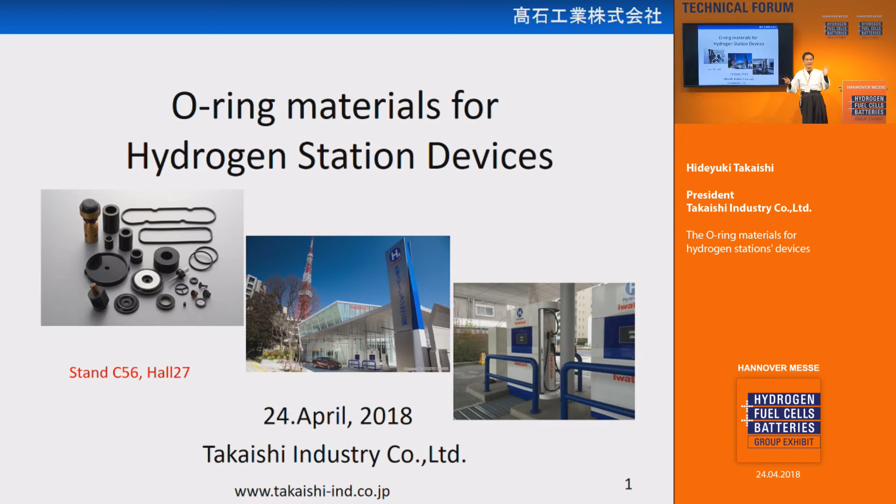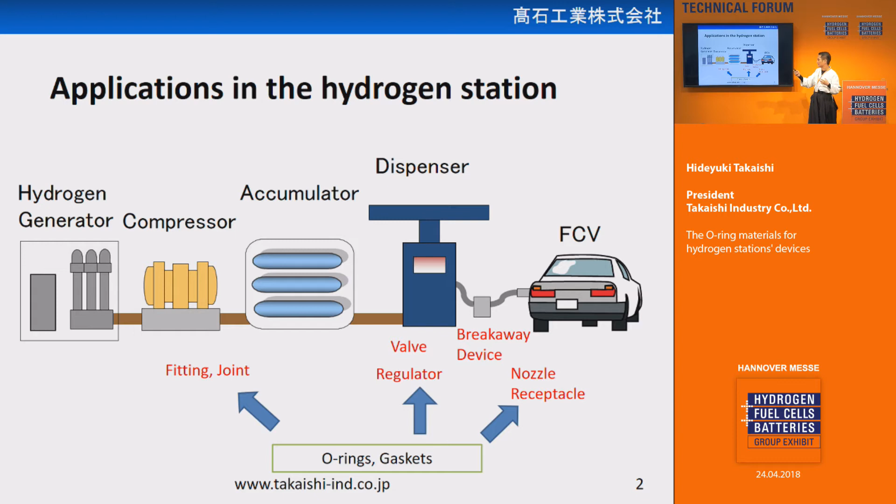So let's go. As you know, there are many applications for hydrogen stations refueling FCV. Pointing here: breakaway nozzle, breakaway valve, regulator, and the tank, compressor or electrolyzer or something. There are so many gaskets and O-rings used, like in joint fittings, valves or something. And first, I want to focus on the breakaway device. This is, I think you know, the safety device for refueling FCV.

The required specification condition of the breakaway devices is very tough. Hydrogen charging time is less than 3 minutes, the pressure range is 0 to 70 megapascal, and the temperature is minus 40 degrees to 85 degrees. This is what we call pre-cool T40. This condition is very, very tough for rubber material to seal.

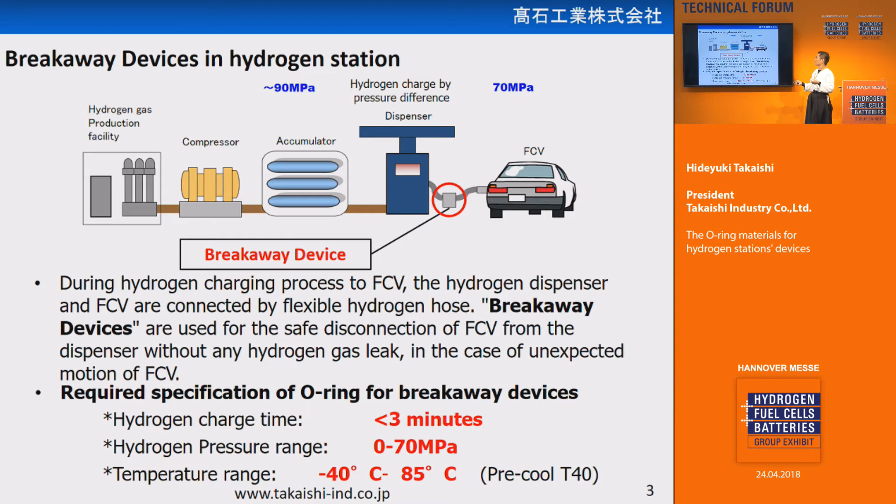So usually an O-ring will break like this. Normal O-ring, yes, with high pressure hydrogen. Hydrogen penetrates into the rubber O-rings. This is the cross section, and when decompressing the pressure, hydrogen inside will explode like a bubble, and this makes a crack. And this is the reason for the leaking.

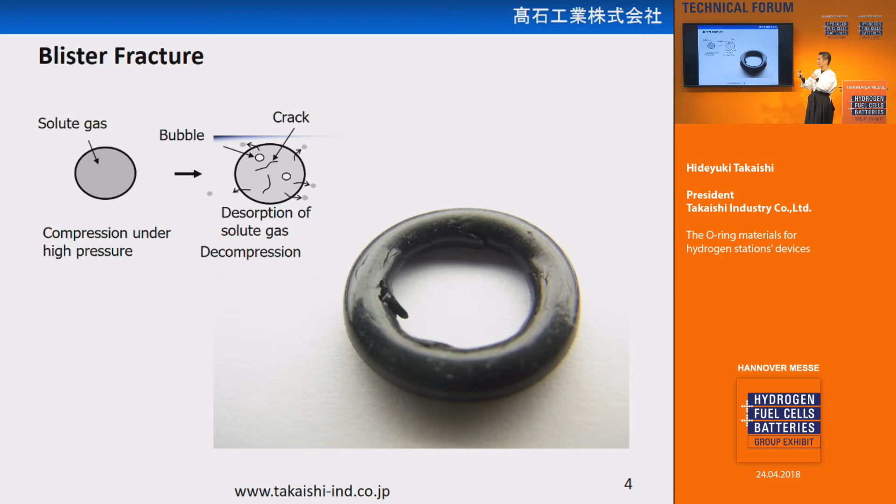And one more fracture, what we call overflow fracture: with penetrating hydrogen, there will be a volume increase of rubber O-rings, sealings, and the sealing will overflow from the groove. That will also lead to fracture.

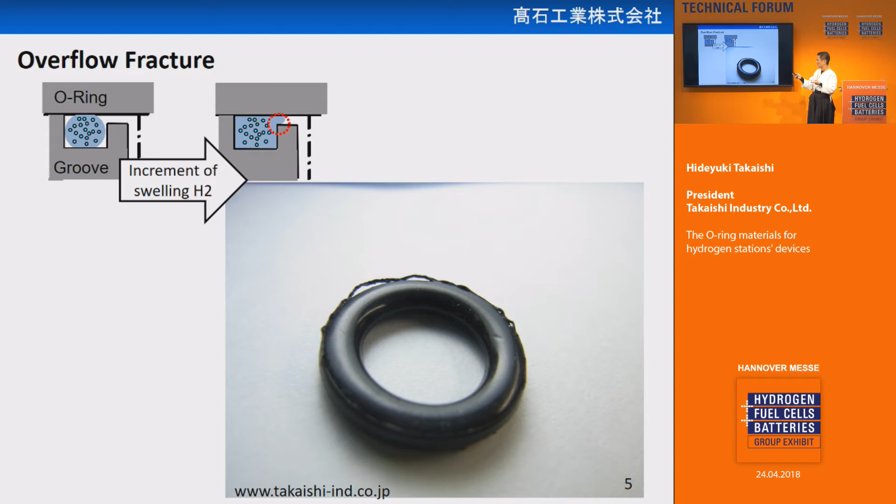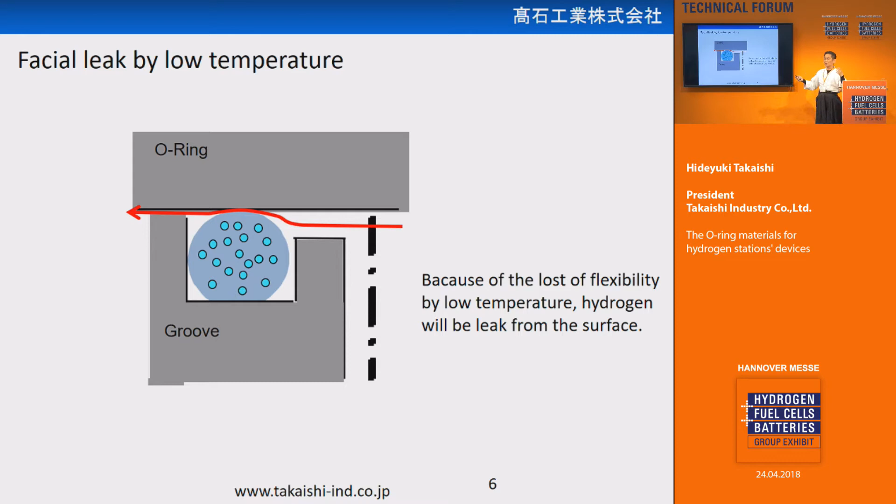And one more, with low temperature, we will have a facial leak. With low temperature, the rubber material will be frozen and it will lose the flexibility. For that reason, with high pressure, like the red arrow, hydrogen will easily leak. We have solved this kind of issue, and we made a solution with associating academia.

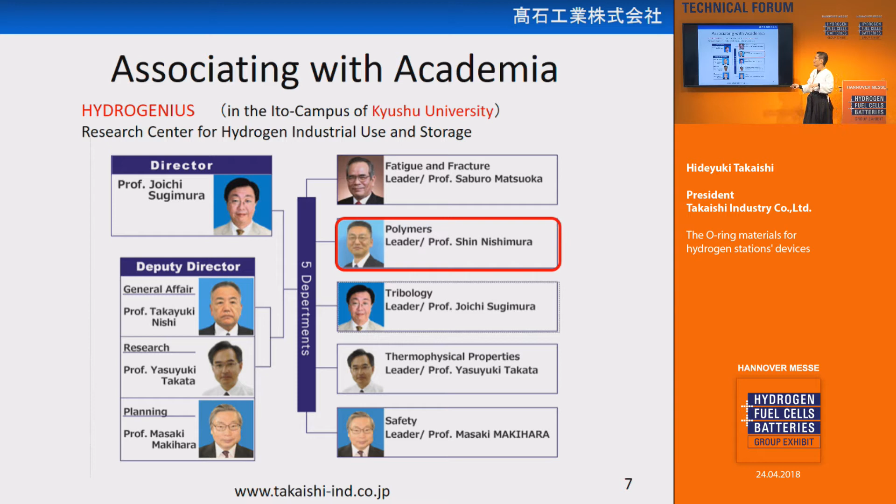This is what we call Hydrogenius. It's from Kyushu University, in the western part of Japan. This university is very, very famous for hydrogen research. And there's a polymer team leader, Professor Shin Nishimura, and we collaborated with him and made the best recipe.

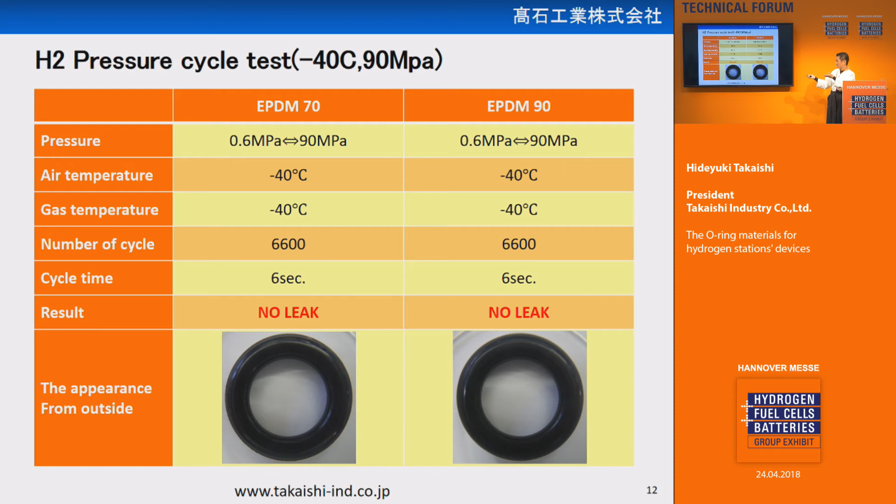It's no problem. And that's why in Japan, our O-rings, that kind of O-rings, are now used in a hydrogen station, a commercialized station. It's near Tokyo Tower, and this is the busiest station in Japan. Maybe on average we have 15 cars per day, and it's working. It's very nice. And now I'm talking about the hydrogen station breakaway devices.

But as I explained, there are many devices and many fitting joints, and by the devices the temperature range is different. For the dispenser, it's pre-cool, minus 40 to 85 degrees, and for the cylinder tank it's normally used at ambient temperature. And for a compressor, it's going to be high temperature. So the material needs to change.

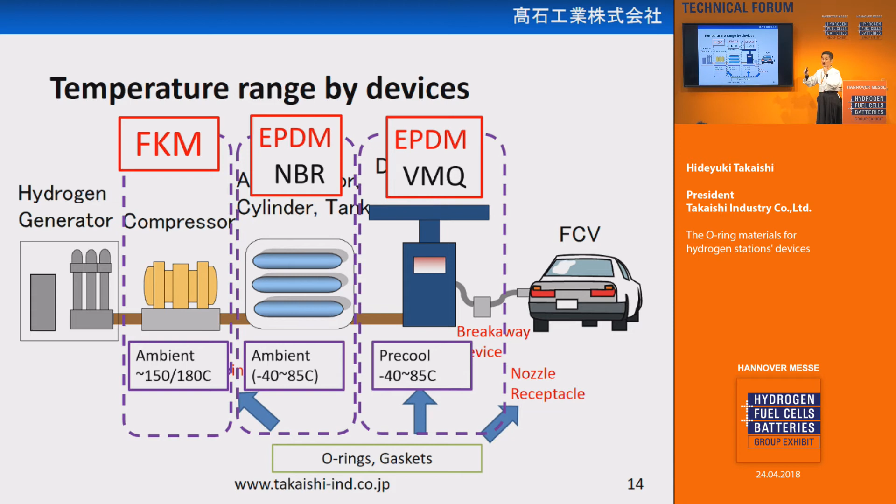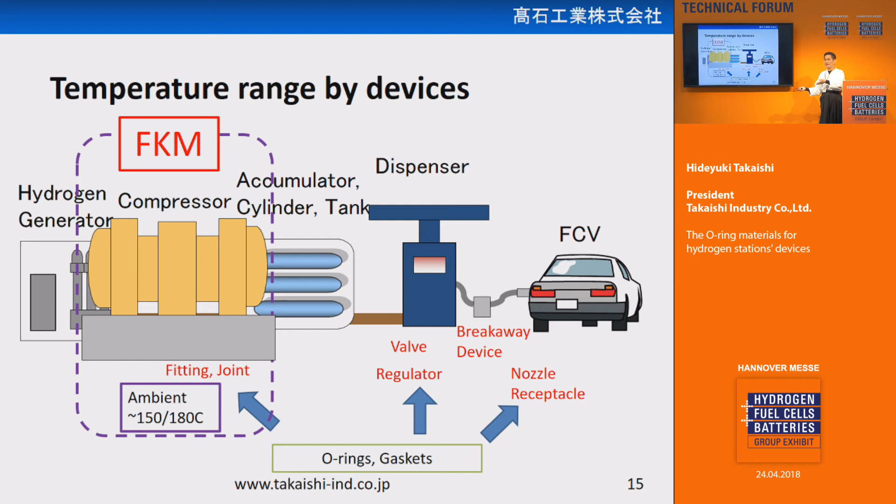So for low temperature and ambient temperature, EPDM is very good. And for high temperature, FKM will be great. So we focus on FKM as the next step. This will be used for the compressor. And we made a best mix again, we found a solution, and we put it into a duration test, a cycling test.

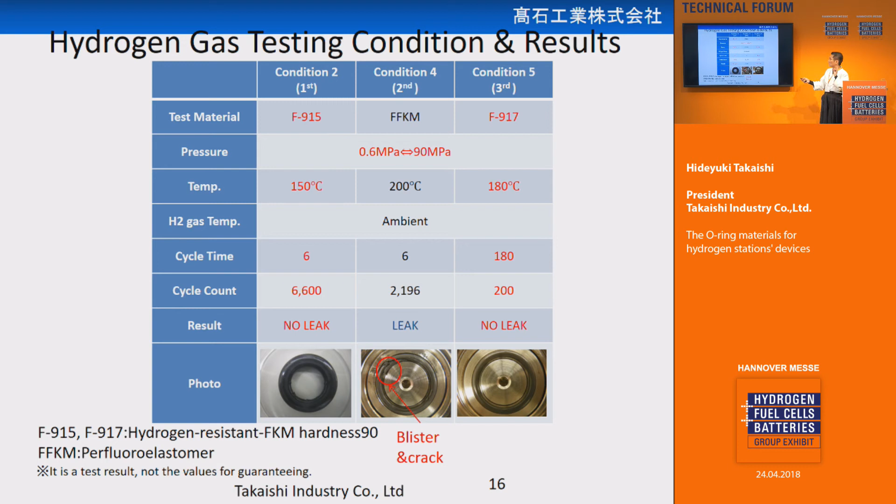So you see the left line and the right line. We made an FKM compound, an FKM recipe, and it can bear up to 150 degrees or 180 degrees. In the center line, for comparison, we tested FFKM. It has very good performance for chemicals, but in the high pressure hydrogen and high temperature test, the FFKM had blisters and cracks, and it leaked. So we made a solution for the high temperature.

So this is the summary. The temperature range of hydrogen station devices differs by device, so it's necessary to make a special compound. We need a best mix to seal them. The O-ring of hydrogen resistant EPDM, our special one, can be used from minus 40 degrees up to 85 degrees. And the O-ring of hydrogen resistant FKM for high temperature can be used up to 180 degrees.

Now we still have some minutes left for questions from the audience. Is there anyone? Okay, so it seems that with your O-ring, the need for changing this old material decreases now. So how long do you think your new O-ring can stay inside the plant until it has to be replaced?

In my test, the duration is supposed to be 1 year, because we have an annual inspection by law for hydrogen stations. So we made a test simulating 1 year of refueling, and we multiplied by a safety ratio of 3. So we made 6,600 times. 1 year of refueling is 2,200 times in our calculation, and multiplied by 3, it means 6,600. Okay, thank you very much. You're welcome. My pleasure.